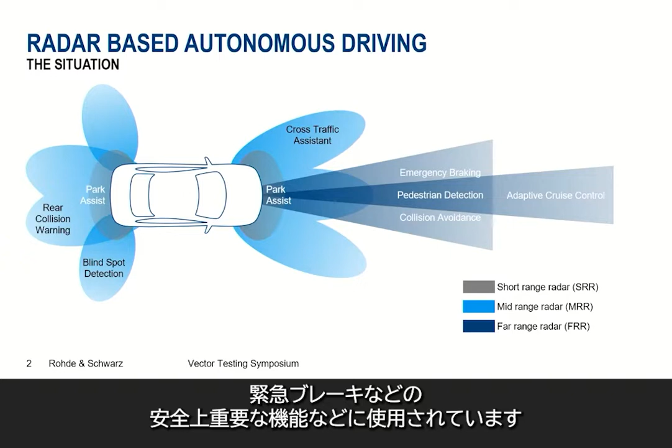So what is the current situation when talking about radar-based autonomous driving? If you have a look at that picture, you can obviously see that more and more radar sensors are installed into the vehicles. They are used for different kinds of applications, so for cross-traffic assistance, park assistance, and even safety critical functions like emergency braking.

One of the key challenges is that all those systems have to be reliably and reproducibly tested in the lab before validation and certification of each of those functions into new cars. With this testing need, several test challenges are occurring. So what is the situation with respect to those challenges?

There is the limitation of current laboratory test options. What does that mean? Over-the-air sensor stimulation is currently missing in a reliable and reproducible way. We have only limited scenario testing capabilities which are broadly available. And a very important part is that azimuthal movement of targets is currently very challenging to simulate.

So current solutions rely on mechanical movement of the antenna front ends, but this movement is critical in terms of reproducibility and also reliability. Open and closed loop testing capabilities like combined solutions are missing. And the interfaces for hardware-in-the-loop applications are often not really open.

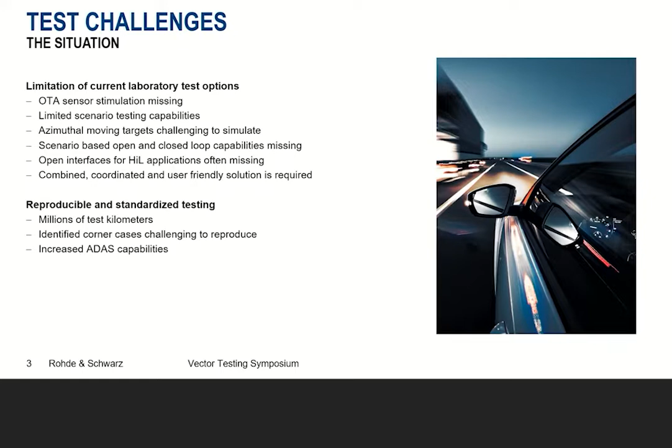Why is this so important? Reproducible and standardized testing is getting more and more important. There are currently millions of test kilometers that were driven with vehicles shortly before they come to market. And during those millions of test kilometers, corner cases are identified. And those corner cases which show some unwanted behavior, for example, of an ADAS feature, are currently challenging to reproduce. And there is obviously a need for that.

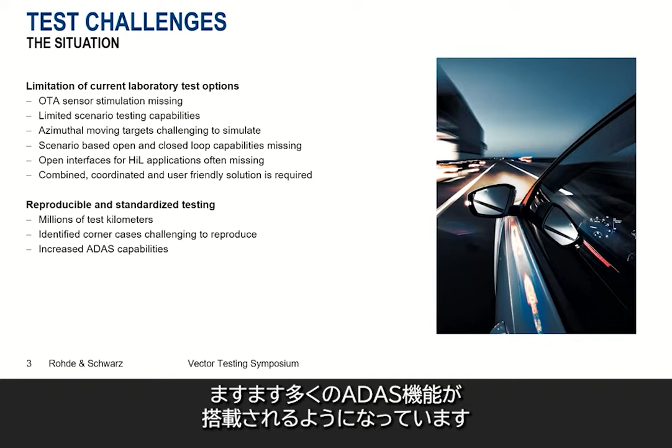And of course, there is an increased number of ADAS capabilities that are coming or installed into new vehicles that come to the market. So now let's have a look onto hardware-in-the-loop validation of automotive radar sensors and the solution that we want to showcase to you today. So let's start with a short system overview.

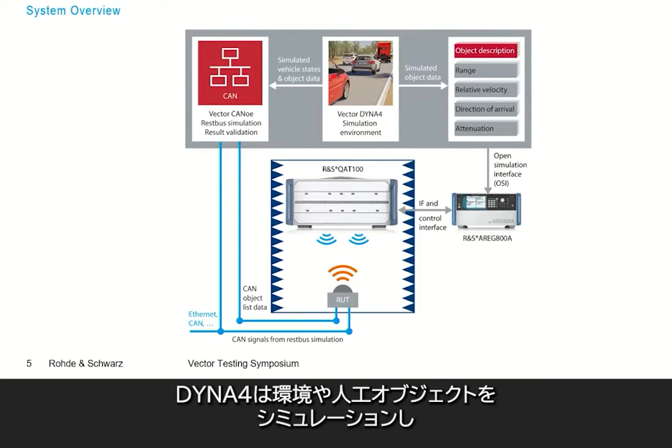The key components of the system are, on the one hand, the Rohde & Schwarz radar test system, as already mentioned, and the Vector virtual driving platform. The Vector virtual driving platform, in our case, consists of CANoe and DYNA4. DYNA4 simulates the environment or the artificial objects, and streams out the object data using the Open Simulation Interface, so the OSI format.

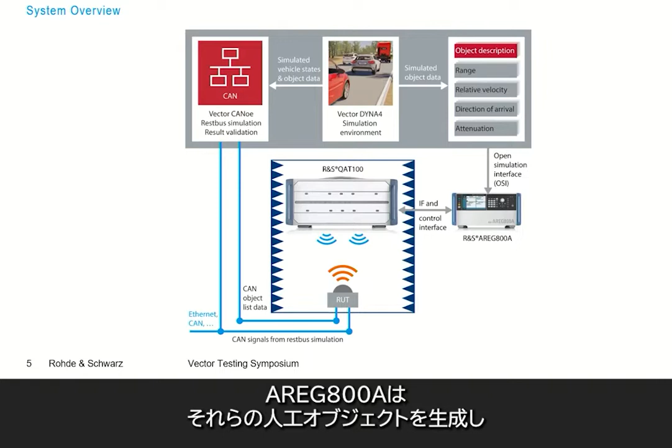This data is streamed into the AREG 800A, which is the backend of the radar test system, which is generating the artificial objects. The AREG 800 then generates those objects and streams them out to the QAT100. The QAT100 is the front end of the radar test system, which is simulating the azimuthal movement of the artificial objects. Then the objects or the scenery is provided over the air to the radar under test.

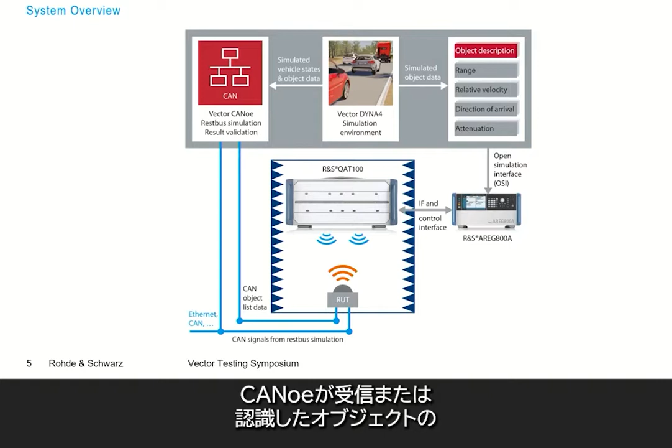And the radar under test, in the end, streams its object list via CAN bus back to CANoe, which then performs a result validation between the simulated scenario and the recognized objects that are streamed out via the CAN bus interface. But now, let's first of all focus on the hardware parts, so the actual radar test system.

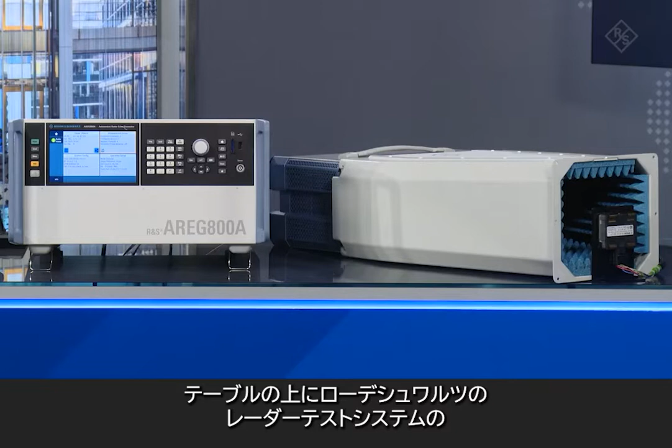In front of me here on the table are the two main components of the Rohde & Schwarz radar test system. The one I already mentioned, the AREG 800A, the automotive radar echo generator, which acts as backend of the radar test system for moving object stimulation. The second part, the QAT100, the advanced antenna array, which acts as front end and is more or less simulating the objects from the azimuthal directions where the objects should appear for the radar sensor under test.

So what are the key features when we talk about the Rohde & Schwarz radar test system? First of all, of course, for hardware in the loop, so open loop or closed loop test cases, the generation of dynamic echoes is necessary. Then, what's also very important is that we have the capability to simulate multiple objects in an independent manner. So with the AREG 800 and the QAT100, we have the possibility to simulate up to 8 individual artificial objects that appear with individual radar cross-section, distance, radial velocity, and azimuth.

What's also very important when we talk about how future-proof a system is, is the high instantaneous bandwidth that we support. So with the QAT100 and the AREG 800, we are able to stimulate radar sensors with up to 4 gigahertz of instantaneous bandwidth. The whole setup, so front end and back end, are performance optimized, which means that they are developed together, and for the user, they are not two individual boxes, but they are controlled and seen as one box, as a one-box solution. So the QAT100 is fully controlled by the AREG 800.

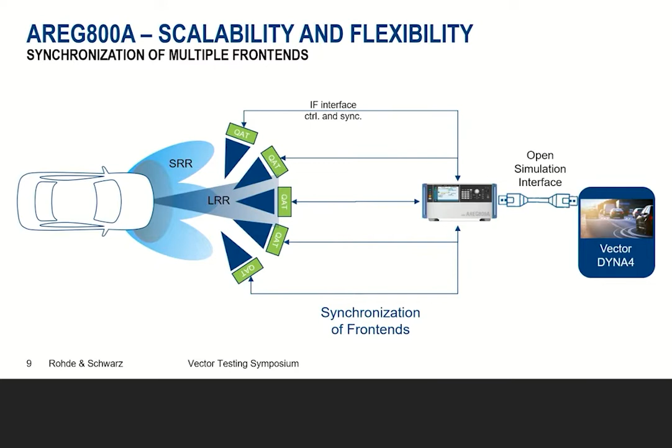So when we talk a little more about scalability and flexibility of the AREG800A, as you can see here on the picture, the AREG800A can be connected with several QAT100s. In this case, for example, one can have a combined testing of multiple radar sensors, or one could also have a solution where we can cover a wider field of view. So that means, for example, if the long-range radar does not only support a long-range mode, but also has the possibility to switch to a short range or mid-range mode, which typically requires a larger field of view.

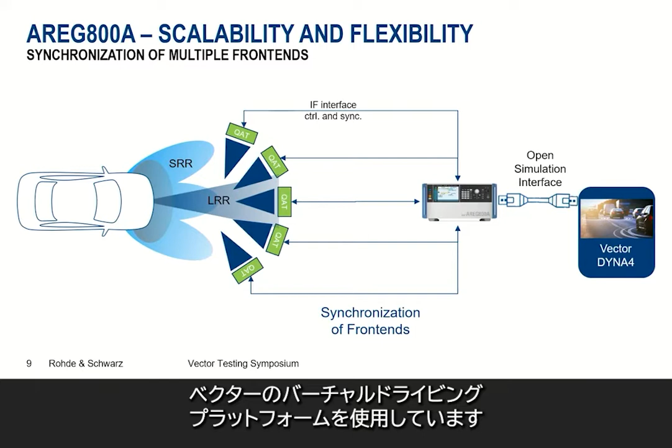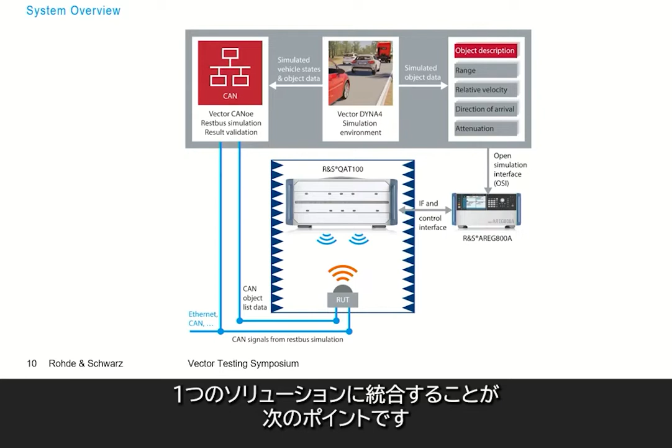If a certain scenario needs to be simulated, then we have the open simulation interface connection to the simulation environment, which in the case of the setup we want to show you today is the Vector virtual driving platform. And that is also the next point where we want to talk about the integration of the Vector virtual driving platform together with the Rohde and Schwarz radar test system into a harmonized and combined solution. And therefore, the second part is still missing. So I would like to hand over to Tobias and ask him to give us a little more insights into the Vector solution. Thank you very much.

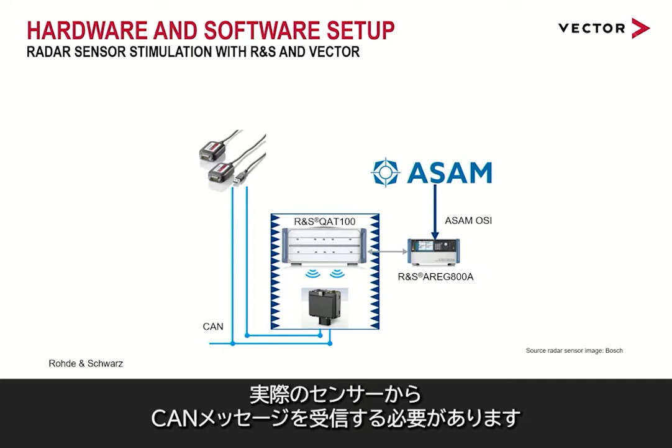For this setup, we need to provide radar detections from the virtual sensor, and we want to receive the CAN messages from the real sensor. The latter is the ideal task for our tool CANoe, which is the tool for developing, analyzing, and testing ECU networks as well as individual ECUs. To provide the virtual radar detections through the HIL API of the Rohde and Schwarz backend, we need sensor models. And not only for the sensor, but also for the vehicle under test and for surrounding traffic participants. This is where DYNA4 comes into play. It contains such physical models and lets you create scenarios for virtual test drives. And to use CANoe as the execution environment, the model can be exported from DYNA4.

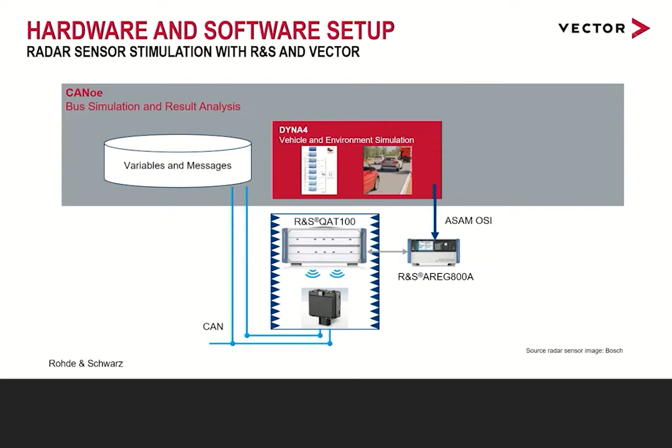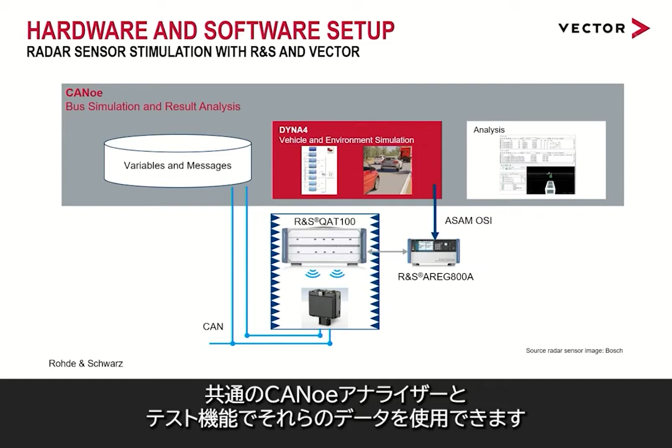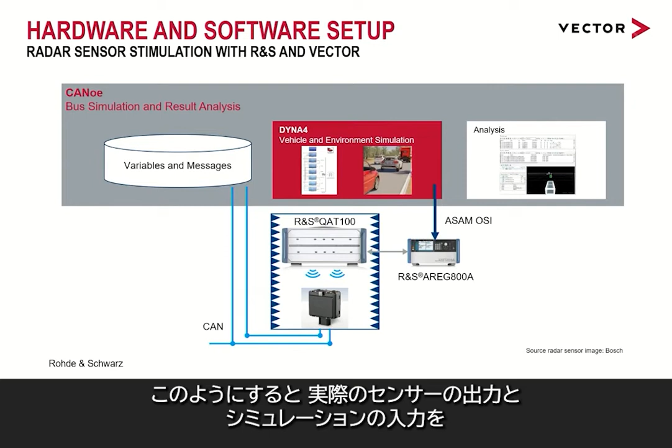In our setup, the compiled DYNA4 simulation model directly communicates with the Rohde and Schwarz backend using ZeroMQ as message queue and the open simulation interface as interface specification. To analyze the available data, the CAN detections are mapped to predefined CANoe objects, and the ground truth from the DYNA4 simulation model is directly transmitted to CANoe, again relying on standardized messages according to the open simulation interface. Once the data is available in CANoe, it can be used with the common CANoe analysis and test features. Here we are visualizing the ground truth objects and the detected objects from the real sensor in the scene window. In this way, you can easily compare the output of the real sensor with the simulation input.

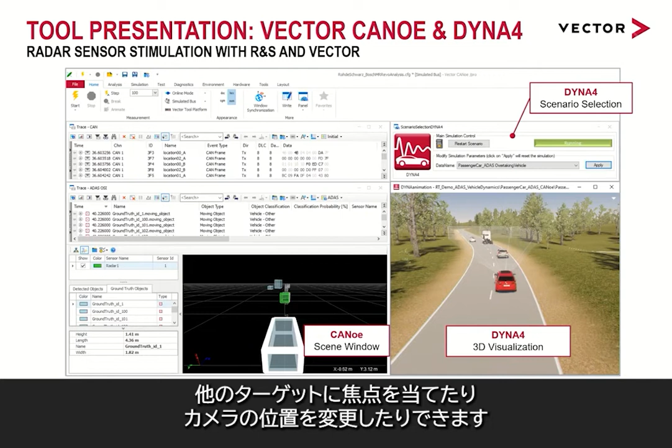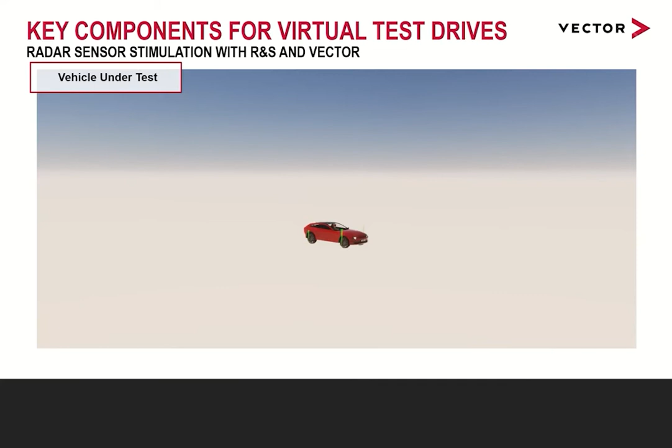And DYNAanimation is part of Vector's virtual test drive solution called DYNA4, which we will have a look at closer now. Virtual test drives require models to reflect the real-world physical behavior. But for ADAS functions, actually a variety of models is necessary, because we are not only interested in a single vehicle, but also in the surrounding of that vehicle and the environment.

Nevertheless, we do need a detailed model for the vehicle under test. In our case, to create a realistic motion of the sensor carrier. And such a model also enables realistic closed-loop vehicle reactions, like if the vehicle needs to perform an emergency braking triggered by an ADAS function.

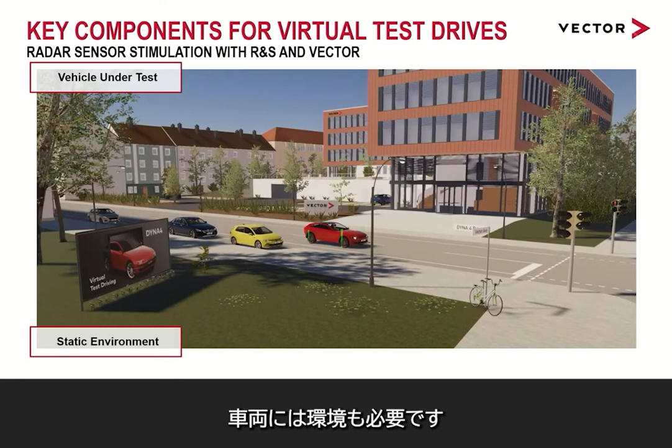Once we have the vehicle, we need an environment. Starting with this static environment, which contains the road network with lane marks, surrounding terrain, buildings, and also environmental conditions like light and weather. Besides this static part, obviously, other traffic participants that interact with each other and the vehicle under test are required to reflect the dynamic environment.

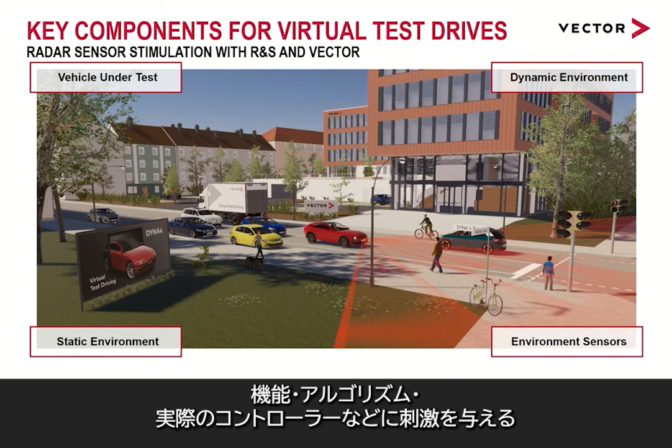Now that the vehicle under test can drive in a virtual environment, we have to sense this environment. To this end, we need sensor models that provide virtual sensor data to stimulate functions, algorithms, real controllers, and so on. Depending on the use case and the interface, this data can range from ideal object lists to complex physical raw data like point clouds.

DYNA4 provides predefined and parameterizable models for all of these domains. And similar to the sensor models, all of these models, depending on the use case, provide different fidelities. For example, a multi-body vehicle with detailed axle models, or a simplified single-track vehicle dynamics model, which requires less parameters.

However, there's one last requirement to mention: an easy interfacing to the system under test. The DYNA4 models are based on Simulink, which makes extensions very simple. This can be done via existing Simulink models, C or C++ code, FMUs, co-simulation interface, and so on. In this project, for example, a custom C++ S-function provides the ZeroMQ message transmission to the Rohde & Schwarz system.

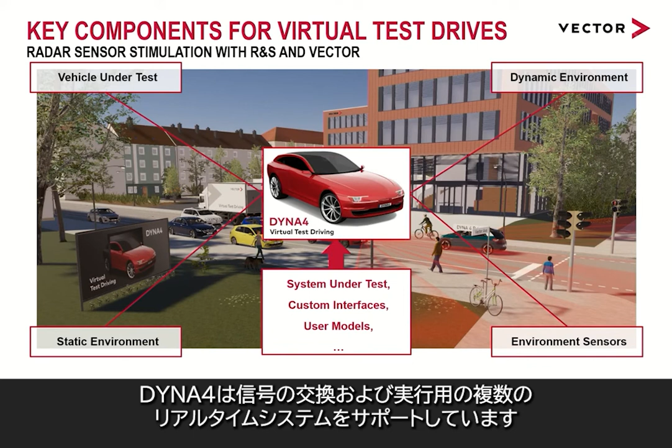And this flexibility is not only limited to pure software tests, as DYNA4 models can also connect to real ECUs. As you know, for this project we use CANoe, but DYNA4 supports multiple real-time systems for signal exchange and execution. And now, let's have a direct look at the tool in our live demonstration.

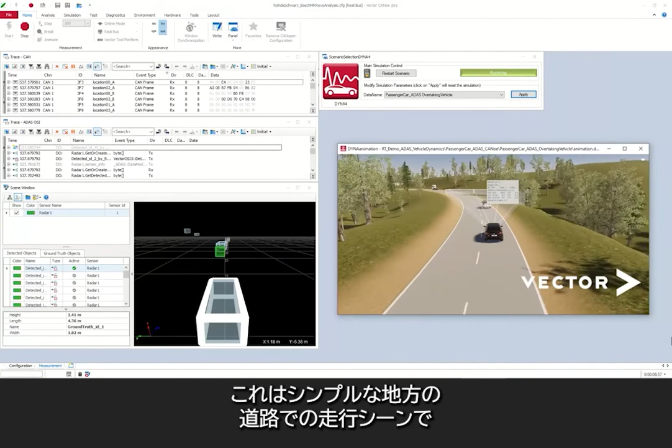Here we have a look at the CANoe main window. On the right side, we see the DYNAanimation window, where we have a visualization of the scene. It's a simple rural driving scene with some vehicles, some of them in front of our vehicle, and also some oncoming vehicles. After the oncoming vehicles have passed, there's an overtaking from the other traffic participant, and finally from the vehicle under test as well.

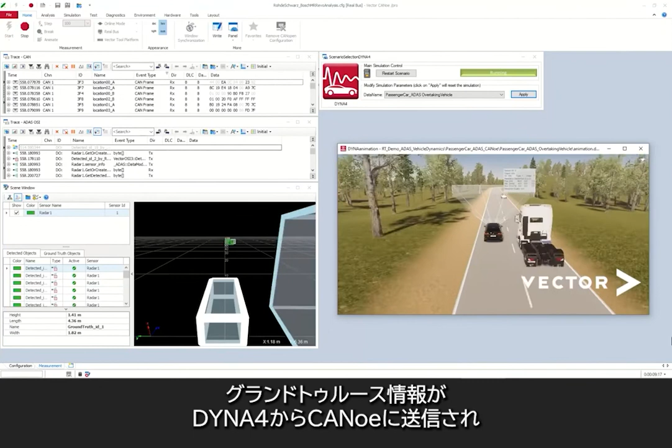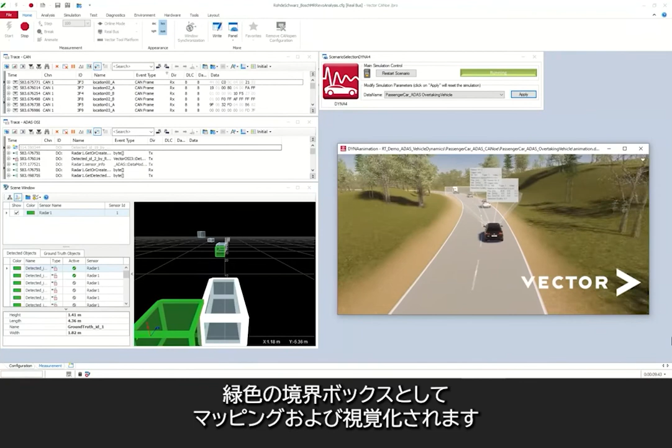The ground truth information from DYNA4 is sent to CANoe, which is visualized on the left side in the scene window, where you have these blue bounding boxes. Furthermore, the radar detections are sent through an Ethernet cable to the Rohde & Schwarz AREG800A. And finally, CANoe is connected to a CAN line and a CAN interface, which receives the radar detection from the real sensor. These detections are mapped and visualized as green bounding boxes in the scene window on the left side.

So thank you, Tobias, for showcasing the setup. Now, let's have a summary of everything we have seen today. So the Vector virtual driving platform and the Rohde & Schwarz radar test system form a fully harmonized solution, which can be used in combination to address various open loop and closed loop test cases.

The setup can be adjusted regarding your test needs and test applications, thanks to its flexible and scalable concept. And precise and repeatable measurements are possible thanks to the QAT100, which allows electronic control of the artificial object directions.